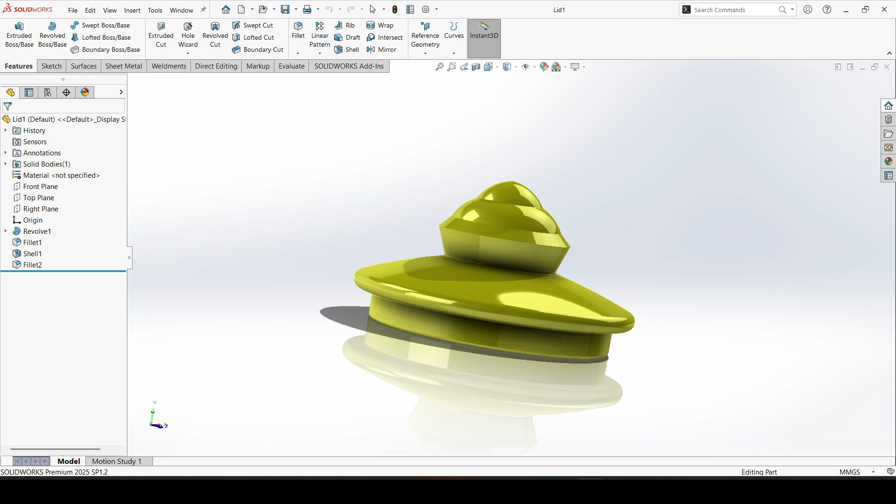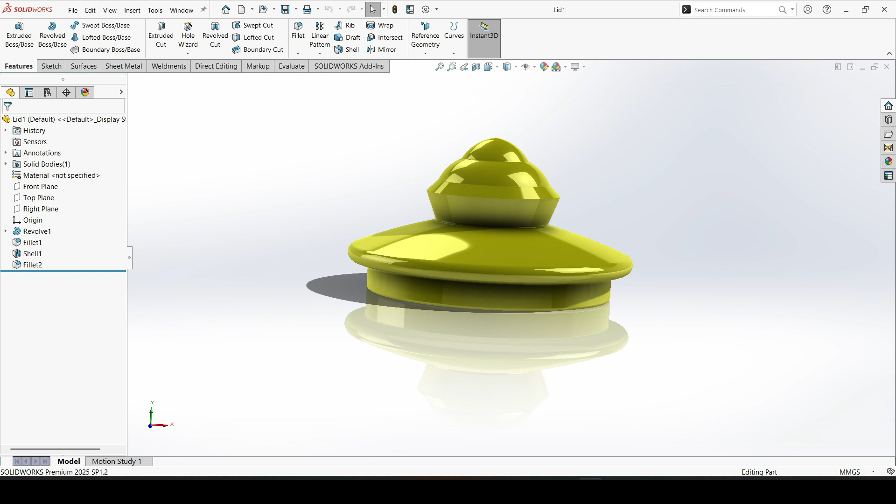In the previous part of this tutorial series, we designed the glass jar body from scratch, and today we will create the matching lid and then assemble it with the jar body to complete the final glass jar assembly. Before we begin, I would like to mention that the lid is currently displayed with a yellow plastic appearance, and this is done only to make the features and modeling details easier to see. Once the modeling is complete, we will apply a glass appearance to achieve a more realistic final look. So let's get started and begin creating the lid.

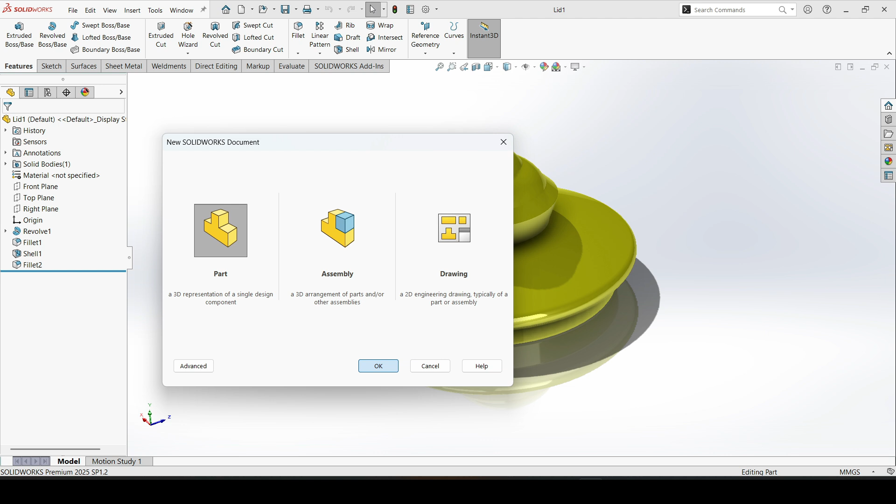Click on File, New, Part, and OK. Now that we have our new part window open, we will begin by creating the profile of the lid.

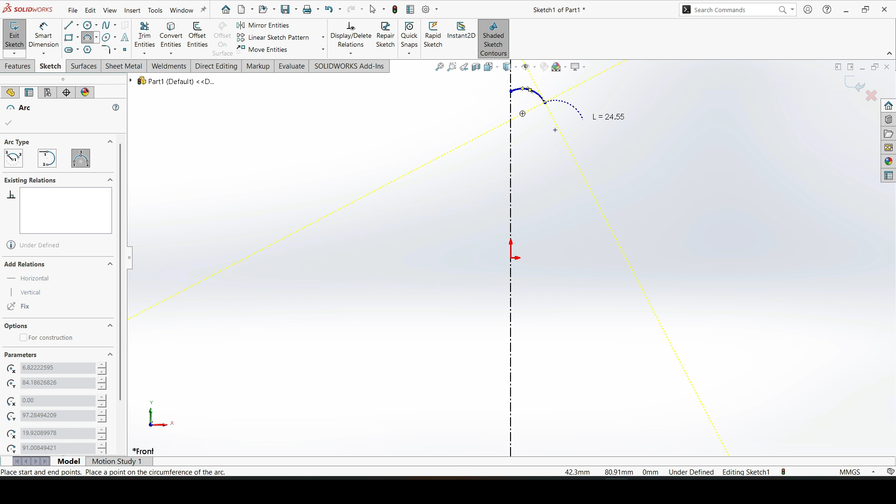Select front plane, sketch, select center line, set the orientation to vertical, infinite length, and place it at the origin. Now select 3-point arc and make two arcs, one here and one more. Now select arc 1 and arc 2, make them equal, click on Smart Dimension. For the radius value of the arc, enter 20 mm.

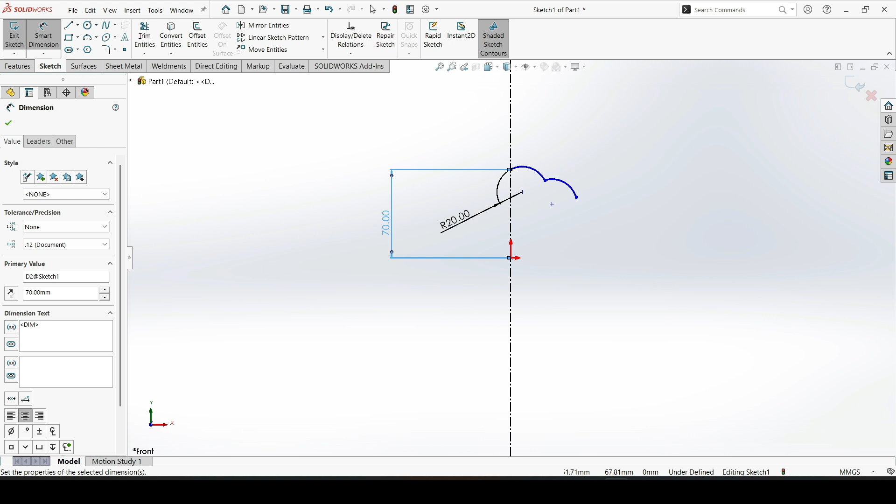Select this point and the origin. This vertical gap is 70 mm. Enter 15 mm. Here enter 10 mm. This vertical gap is 10 mm. And this time enter 20 mm.

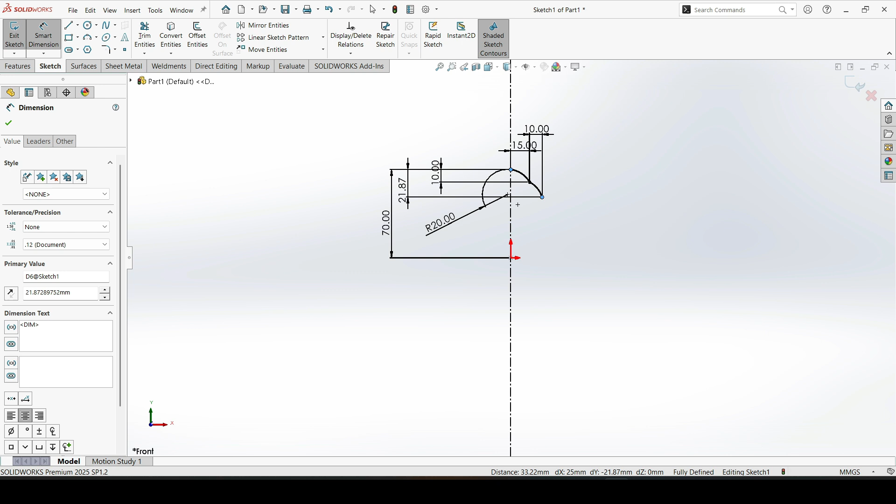Now select line 1 and line 2. Click on Smart Dimension again. Select this point and this top point. Enter 25 mm. This point and this point, this is 13 mm. 30 mm. And this is 25 mm.

So now we have the profile ready for the top handle for easy gripping. Now we would be creating the mating geometry that fits the jar opening.

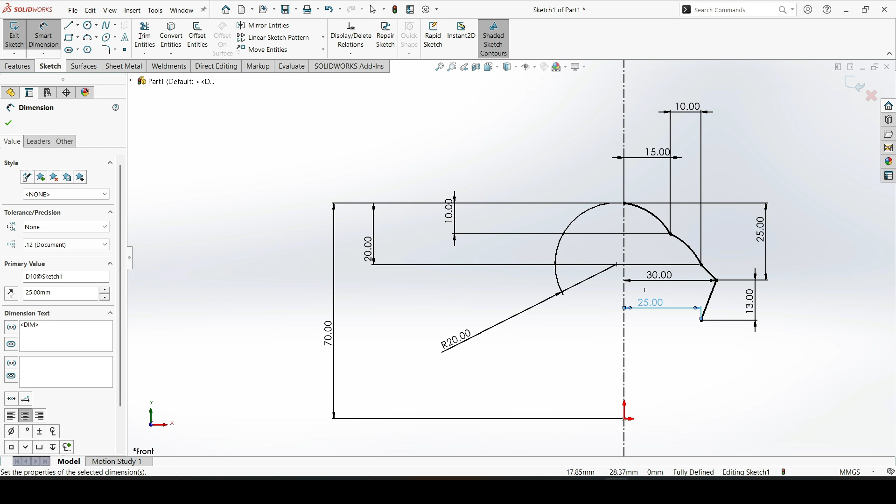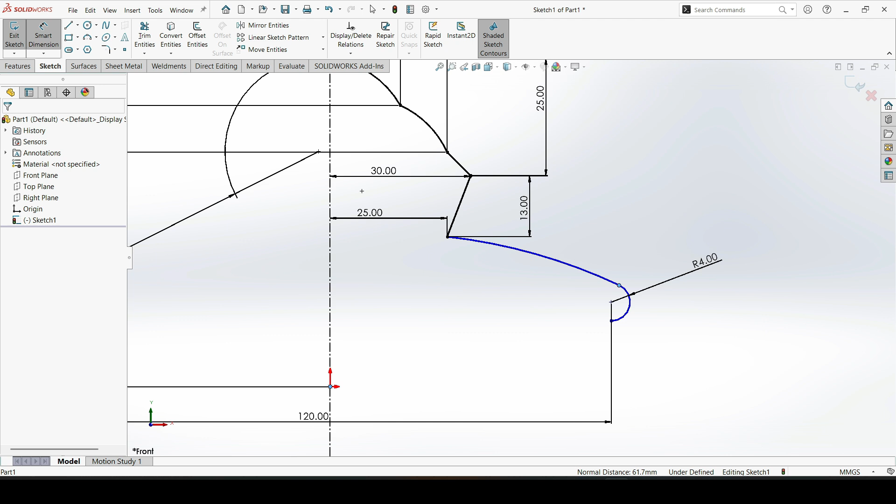For that, select 3-point arc, point 1 and point 2. Make one more arc. Smart dimension. Radius for this arc is 4 mm. Select this point and the central vertical axis. Enter 120 mm here. Select this point and the origin. This gap is 20 mm.

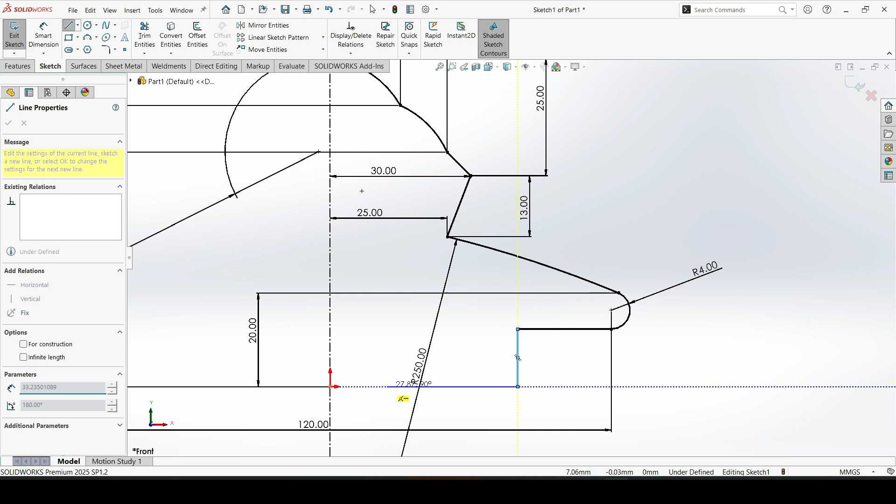Select this arc, and the radius value for this arc is 250 mm. Now select line. Make a horizontal line like this. Now a vertical line, come to the origin and now go to the top. Click on Smart Dimension. Select this point and the origin. And this is 109.52 divided by 2.

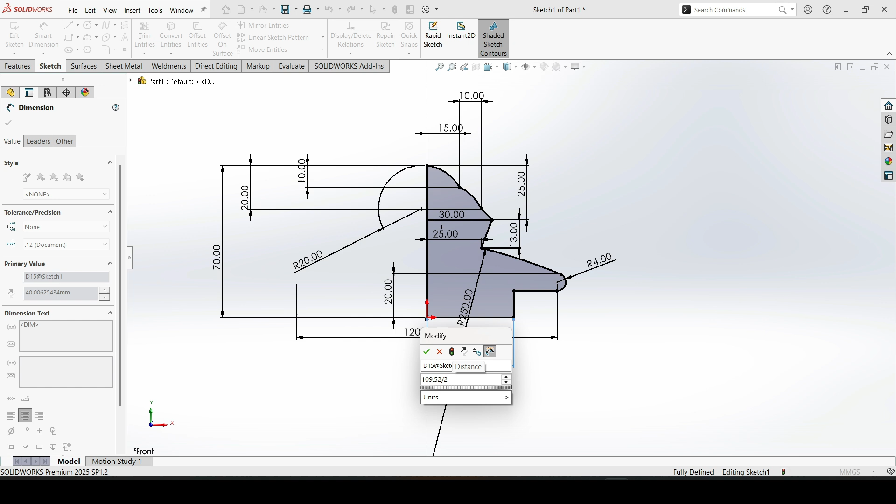Okay, so we have our profile ready. Now go to Features, and click on Revolve Features to generate the main lid shape. Click OK.

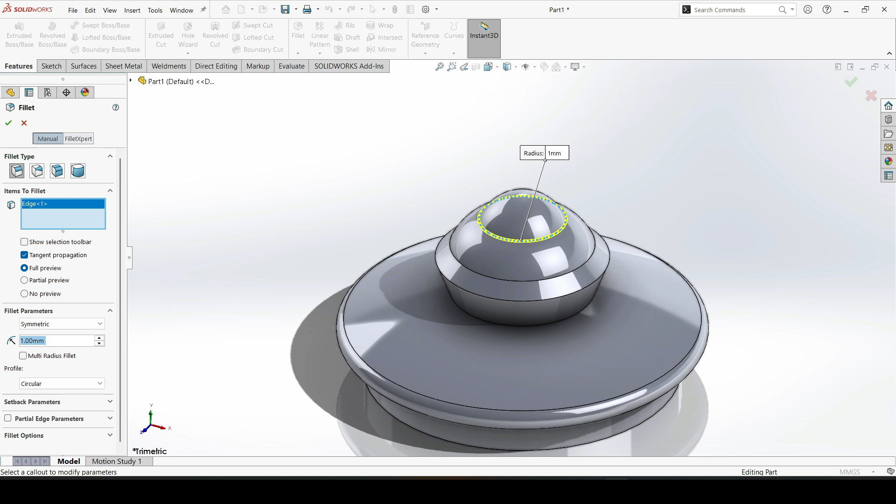Now select fillet, radius 1 mm, and select this circular edge. Then select this one, select this edge, and this one here. Now click OK.

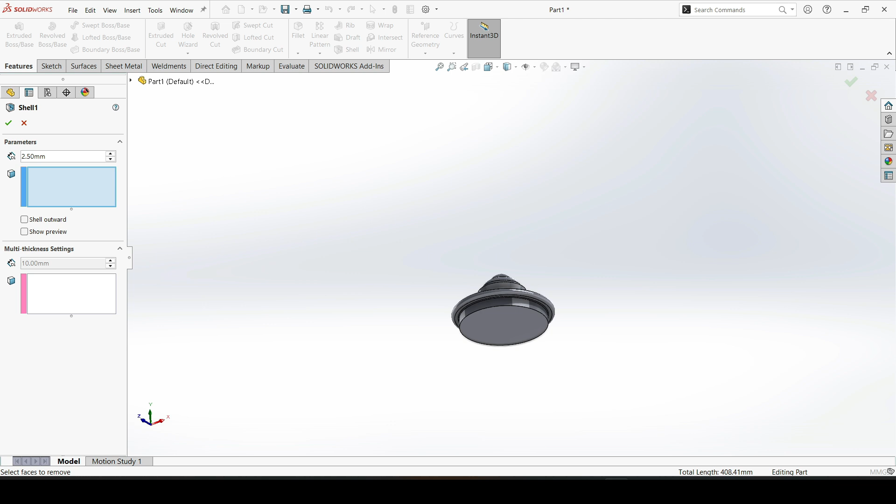Click on shell. Shell thickness is 2.5. Select this bottom face and click OK.

Click on fillet. Select full round fillet. Face 1, face 2, and face 3. Click OK.

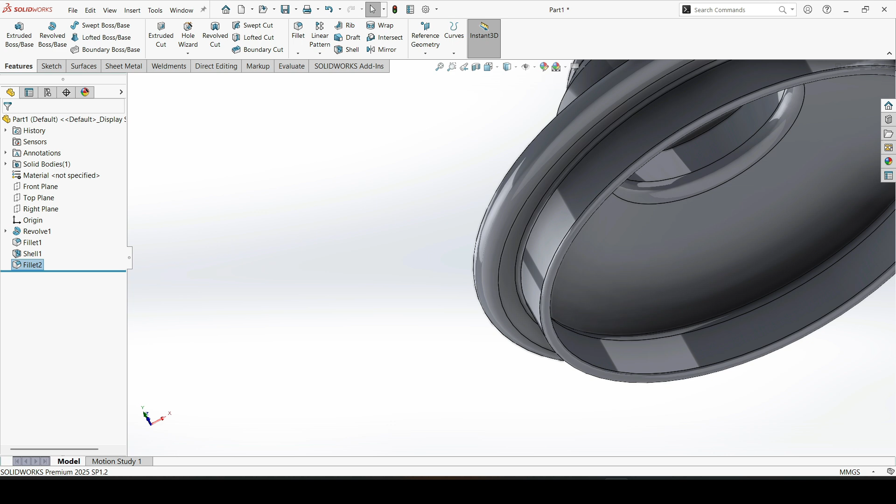Now as you can see on the screen, our part is complete. Now click on appearances, glass, gloss, and reflective green glass. Change the display style.

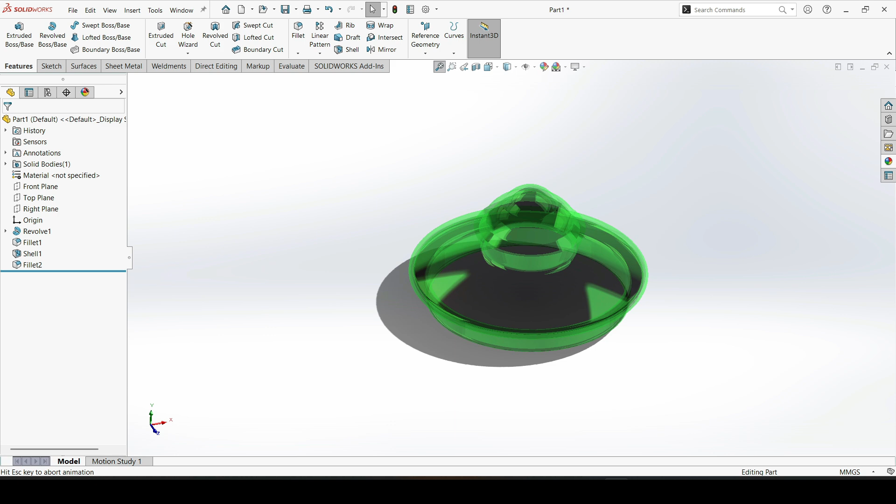Now that the lid is complete, let's move to the assembly environment and combine it with the jar body created in part 1. And before we do, let's save the part first. Part 2, save.

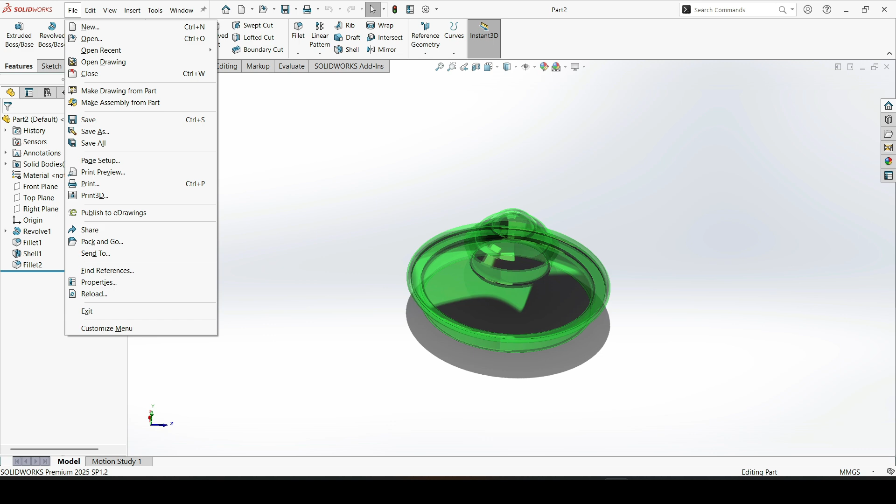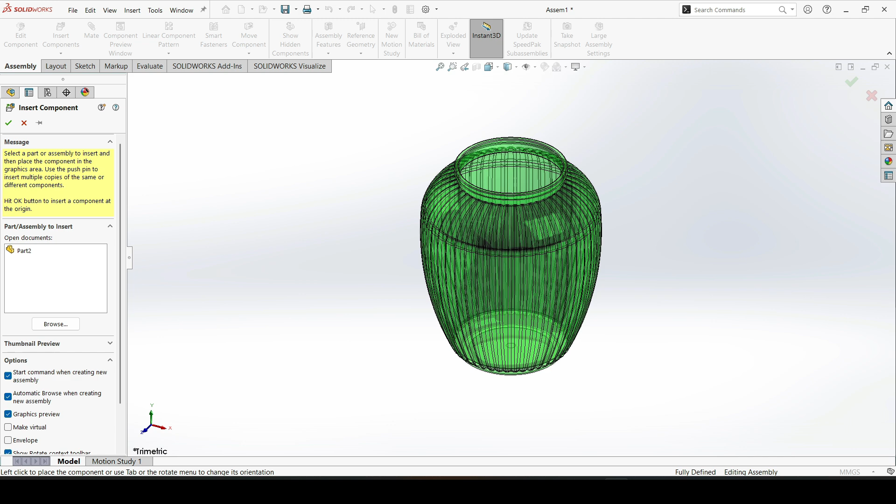Now click on File, New, and this time select Assembly, OK. Click on Browse here and select part 1. Drop it somewhere here. Now click on Insert Components and bring part 2. It's somewhere here.

Now select Mate, and select the cylindrical face of the lid and this cylindrical face of the jar body. Concentric, OK.

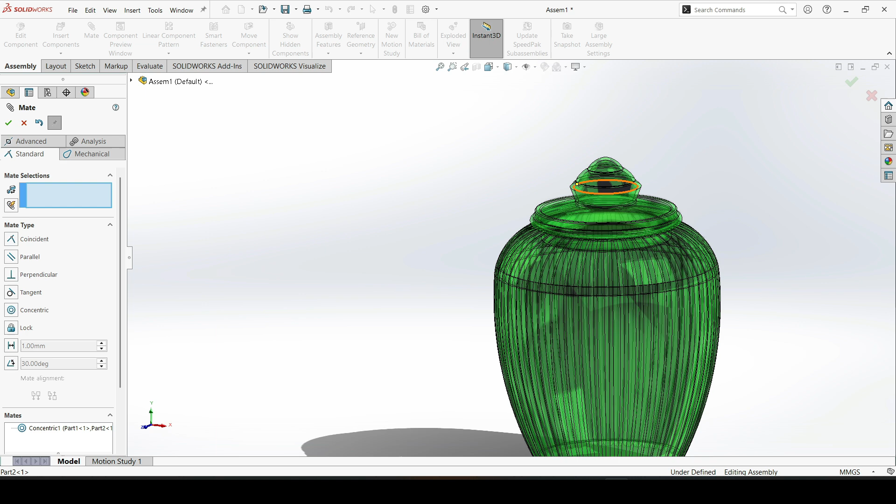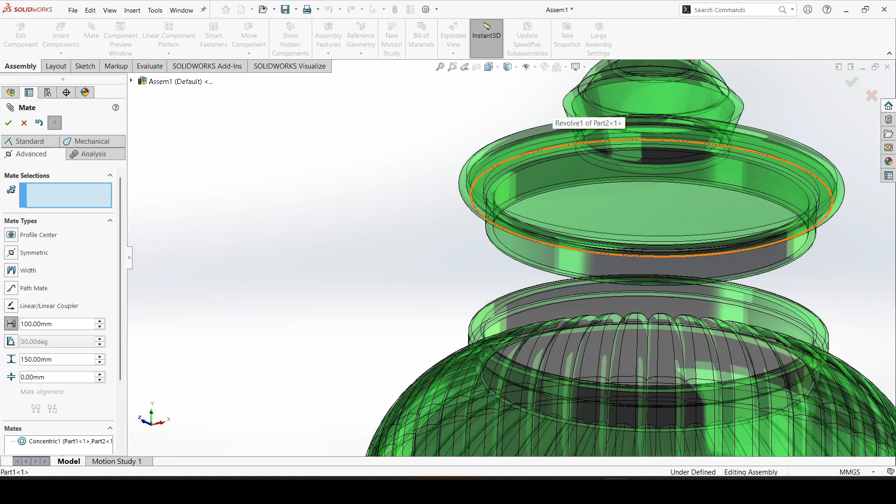Drag it a little upwards. Now go to Advanced Mate. 0 mm, maximum 150 mm, 100 here, and now select the faces. Select this face of the lid and this face of the jar. Click OK. OK.

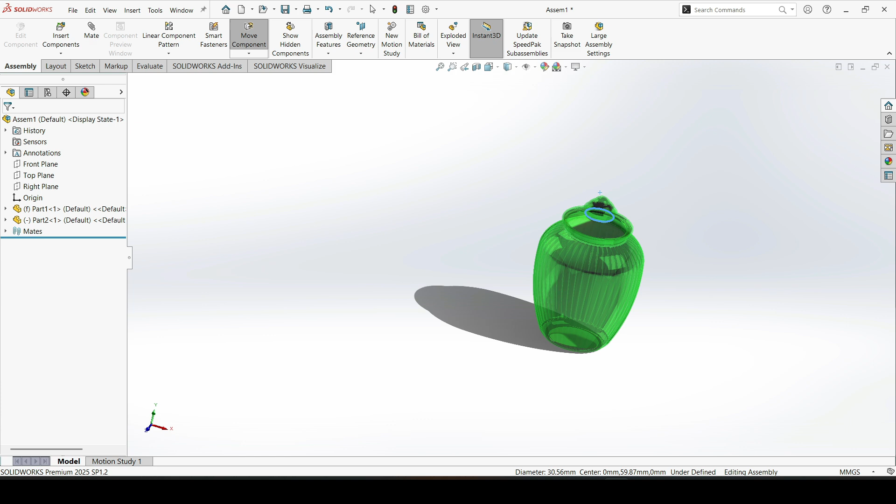Change the display style. Now as you can see on the screen, the glass jar project is complete now. We have designed the lid, assembled it with the jar body, and applied a realistic appearance to visualize the final product.